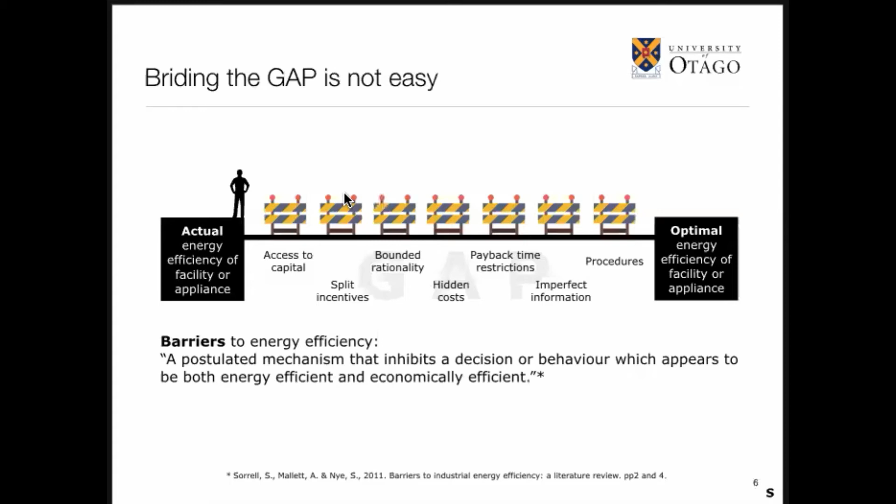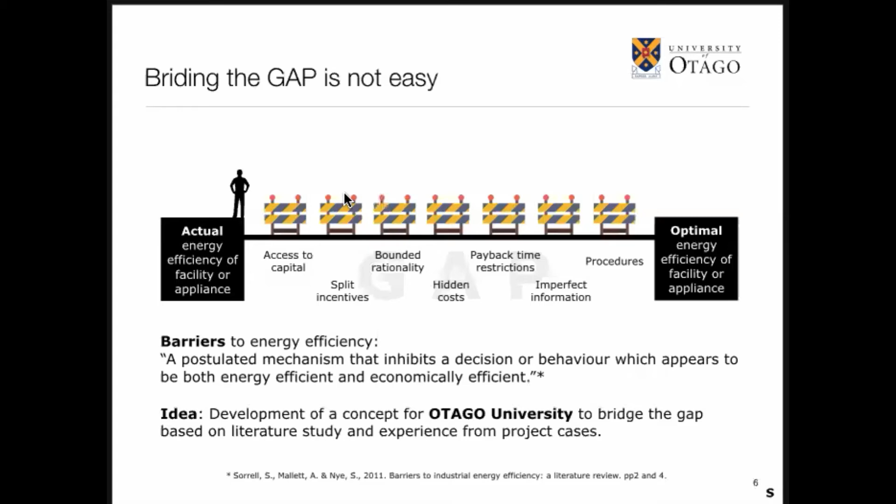So what is necessary is we need to do something. We need to have some sort of a concept. That was the idea: development of a concept for the Otago University to bridge the gap based on literature study and experience from project cases. Okay, let's go one step further. So we try to bridge the gap. So we focus on the gap.

What is the gap? The gap, as I said already, is the actual energy efficiency compared with the optimal energy efficiency. So the focus is on energy efficiency. What is that? Energy efficiency is usually defined as useful output divided by energy input. So it's not just the energy consumption. From the energy efficiency point of view, it is acceptable to increase energy consumption in cases in which the useful output increases also.

Yeah? So this is relevant here. So we are not talking about energy consumption solely. We are talking about energy consumption in relation to the driver. So what is energy efficiency in practice? Here's an example.

Boiling water, for example. You want to boil 10 liters of water, and you need around about 1 kilowatt hour for this. And you write such a quotient: 10 liters boiling water divided by 1 kilowatt hour energy. This is the value of the energy efficiency.

Often people have problems using this energy efficiency value. Sometimes it's a little bit difficult to understand. And therefore, in most cases, you see the reverse, the inverse formula. So you just put it upside down, and then you get not the energy efficiency, you get the energy intensity, which is energy input divided by useful output.

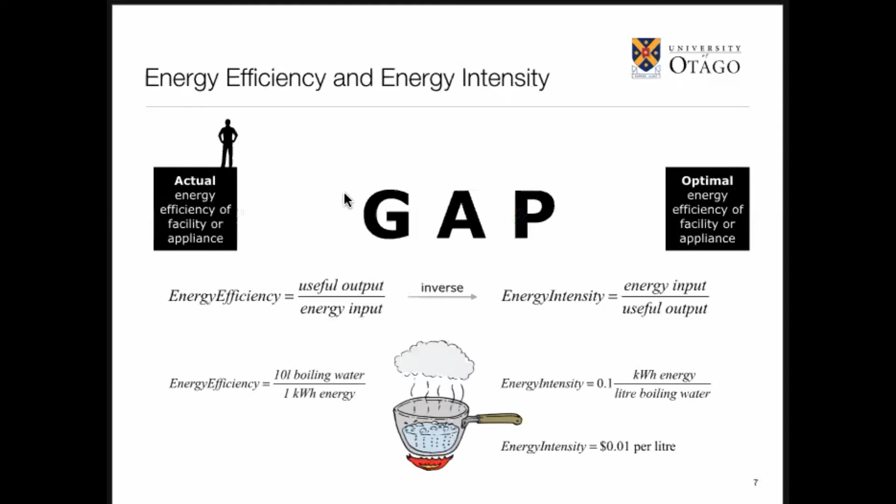And in practical industry projects, we are very much used to using energy intensity instead of energy efficiency. Although we say we want to increase the energy efficiency, we calculate energy intensities. We will do this later. You will see. Okay. Next point.

So I explained energy efficiency, the formula. And now we should talk about the energy efficiency gap. What is that? The gap is commonly defined as the difference between actual and optimal energy efficiency. So the question now is, what is optimal? There is not one optimal efficiency. There are different kinds of optimal efficiency that we have to differentiate. And we have to select one that should be the benchmark for our actual energy efficiency.

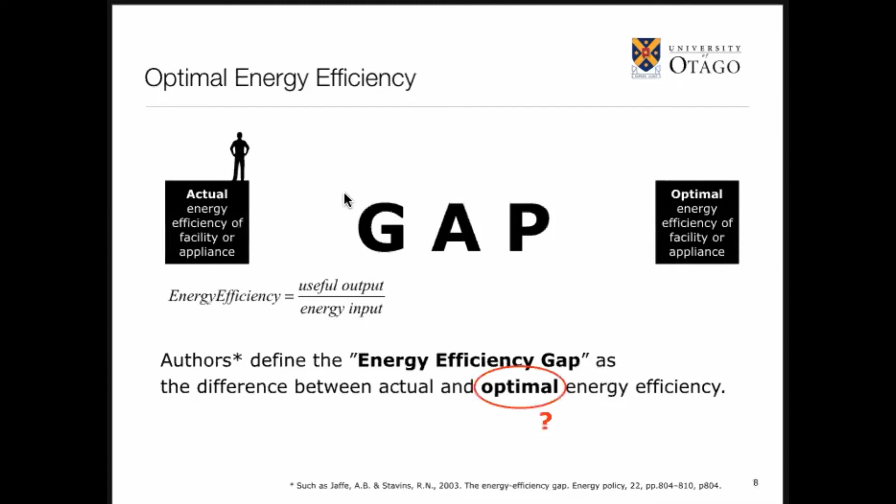What do I mean? Usually we differentiate three types of energy efficiency: the thermodynamic optimum, the technological optimum, and the economical optimum. All three of them could be the benchmark for comparing with the current level of efficiency. What do these different optimums mean?

What are the differences? The difference between the thermodynamic optimum and the technological optimum is the technological innovation. This here is the absolute limit. This is what theoretically could be possible in the future. More efficiency is not possible as far as we know at the moment. That does not mean that this is practically possible.

This is theory. And the difference between what is theoretically possible and what could be possible in real life, this is then the technological optimum. So this is a matter of technological innovation, technological development to go from here to there. The difference of these two bars here could be named technological gap. This is one part of the different gaps that we should discuss, the difference between thermodynamic optimum and technological optimum.

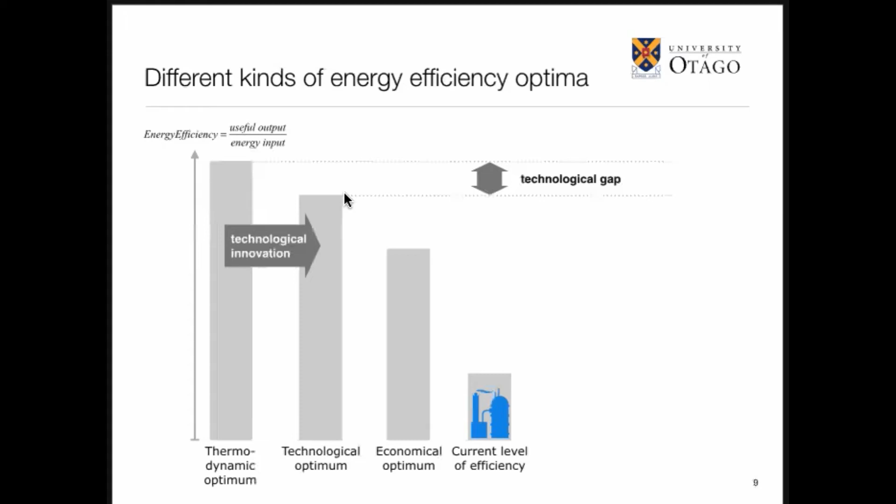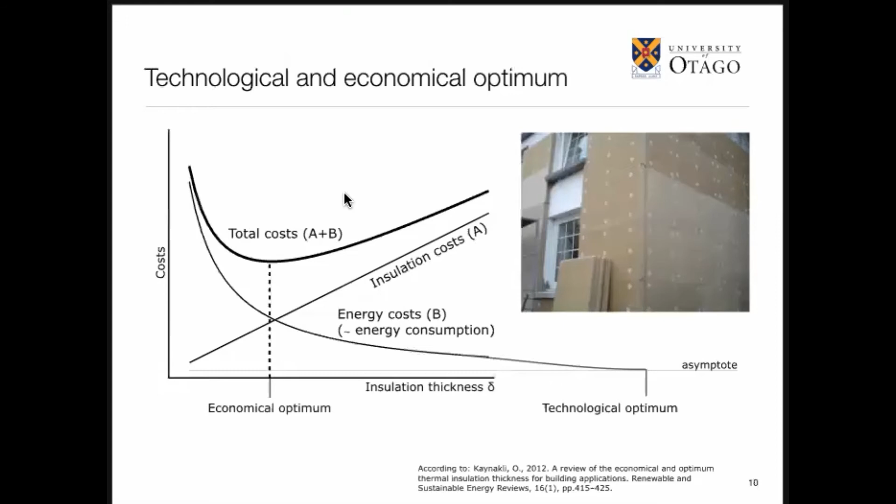Our question now is, what are the parameters? The parameters can be found out by varying the influence factors, the drivers of these functions. For example, what can I do? I can say, look here, this was my insulation cost. What happens if the price of the material decreases? Then the function goes from here to there, this red line, right? So this is a little bit cheaper.

And on the other hand, if the energy prices rise, then this cost function here goes up. And if this goes up from gray to red, and this goes down from gray to red, then we have a shift from this optimum to that optimum. So that means the parameters of the economical optimum are, first of all, the investment prices of what you have in mind when you want to increase the energy efficiency. Here, this is the investment. And if these investment prices go down because of mass production, whatever, this is good for energy efficiency because the optimum goes from here to there.

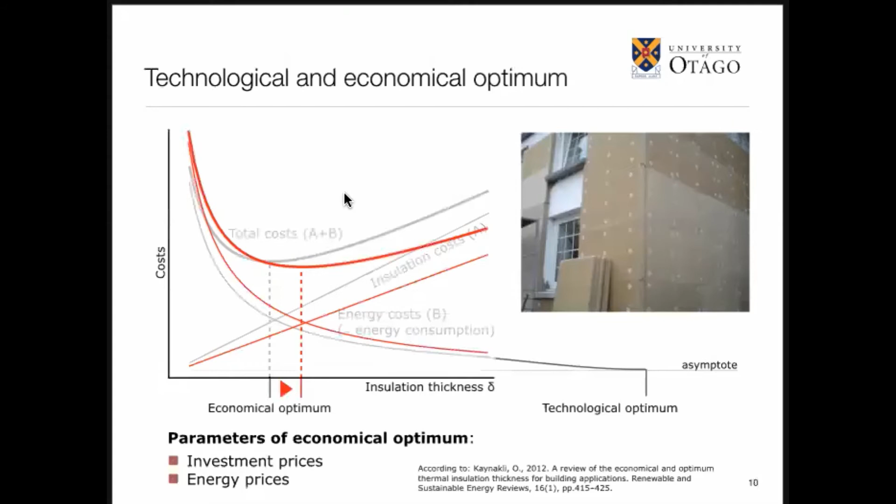Or it is good for energy efficiency when the energy prices here, from gray to red, go up. When the kilowatt hour becomes more expensive, then we have such a situation. All right. So in other words, the difference between technological optimum and economical optimum could be named a cost gap. It's depending on energy prices and investment costs. So we're not talking about this. This is determined by technological development and by external cost settings.

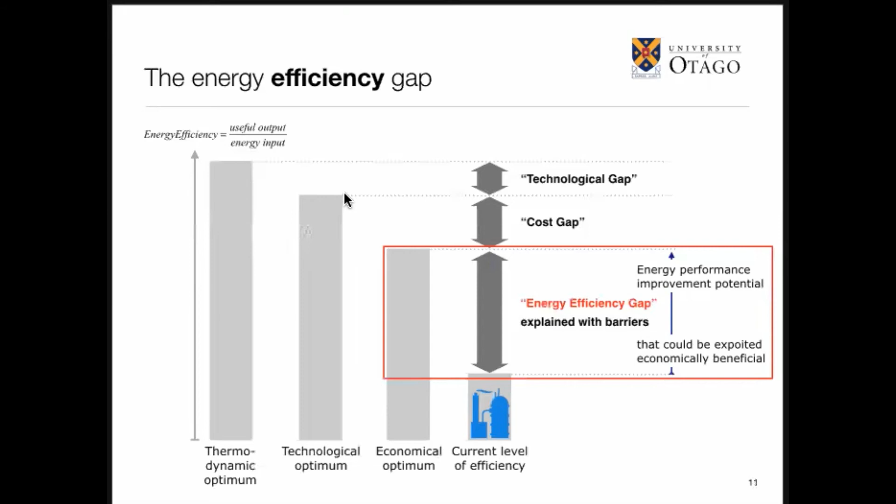We're talking about this, the energy efficiency gap. This is the remaining part of the difference between the current level of efficiency and something optimal. So it is the difference between current level of efficiency and economic optimum. This is what we think we should exploit, which generates a positive net present value. But most of the companies have this gap, but they don't do it. So it is the energy performance improvement potential that could be exploited economically beneficially. And as I said before, the prices of investment and also of energy play a major role here.

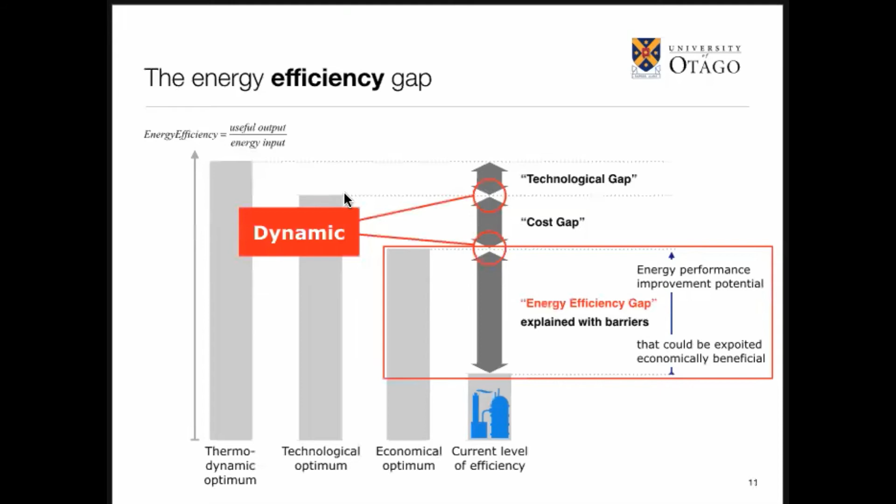These gaps here, how big they are, this is dynamic. As Ivan said already, it is not static, it's dynamic. So that means when we want to exploit the potential that might be there, we should try it on a regular basis, not just one time. It's not a static thing, it's a dynamic thing.

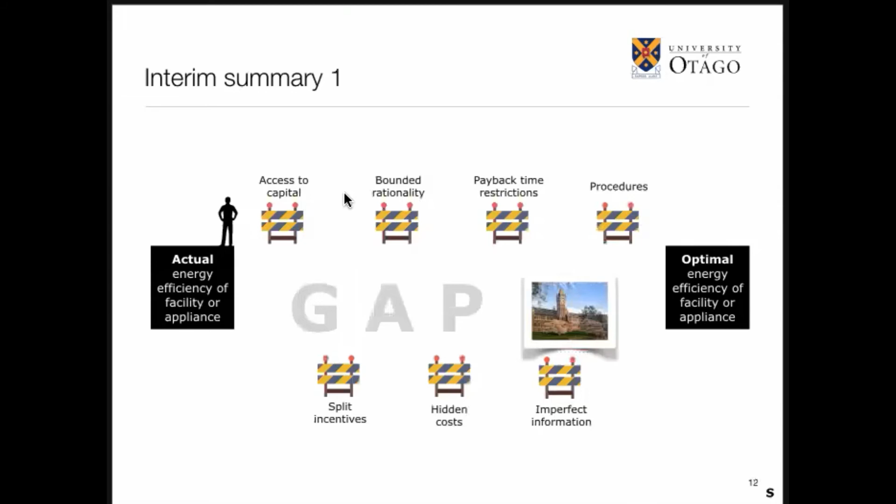Okay, let's try to summarize what I've said so far. So first of all, there's an energy efficiency gap. Most likely also, as we know already, at the University of Otago. Like in all organizations, there is a gap that we should bridge. There are lots of barriers that should be removed in order to exploit it. We need a platform, an environment, something that helps us to continuously exploit the economically beneficial energy efficiency potential in a way that this something must help us to remove.

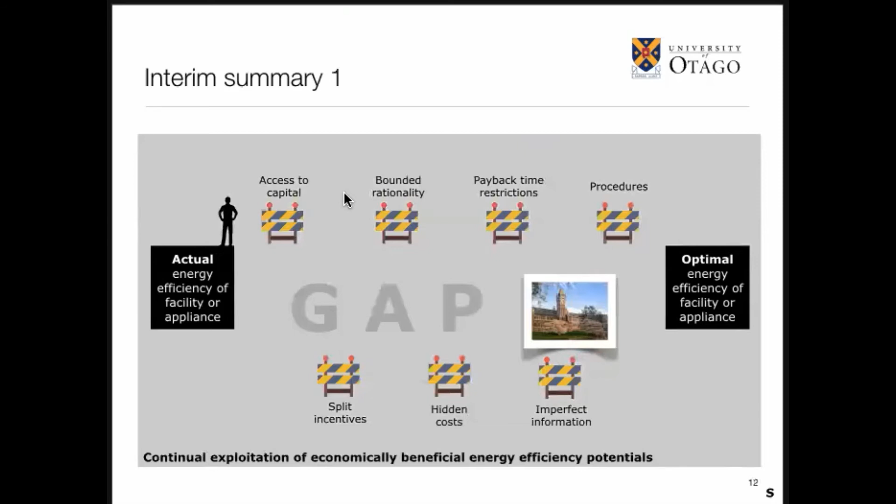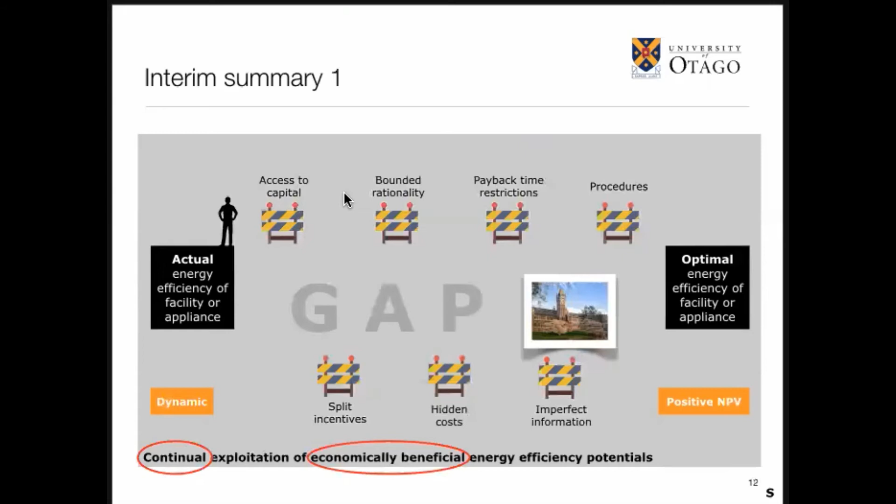It should be dynamic, therefore continuous, and it should tell us the economically beneficial energy potential. So it should tell us what the positive net present values are, and this something should remove all of the barriers and build the bridge. This is what we want. So having this in mind, we started to generate ideas. What can we do in order to bridge the gap here at the Otago University?

And one first element that came to our minds was ISO 50006, an international standard that was released in 2014. And the idea was that we could use this standard, which has already, and I'll show you in a moment, proven to be very effective, as one of the elements. What is it about? Let me just briefly explain what ISO 50006 means.

It is an international standard for increasing the energy performance of organizations. That's the target of this standard.

How does it work? When you implement this standard in your organization, the first thing that you have to do is the determination of the energy consumption of all relevant processes. You set up a list of all of your relevant processes. I'm not talking about coffee machines or something, I'm talking about the relevant processes. Then you set up such a list, you put them in an order, and then you check what are the so-called significant energy users: those processes that you would consider as very energy intensive.

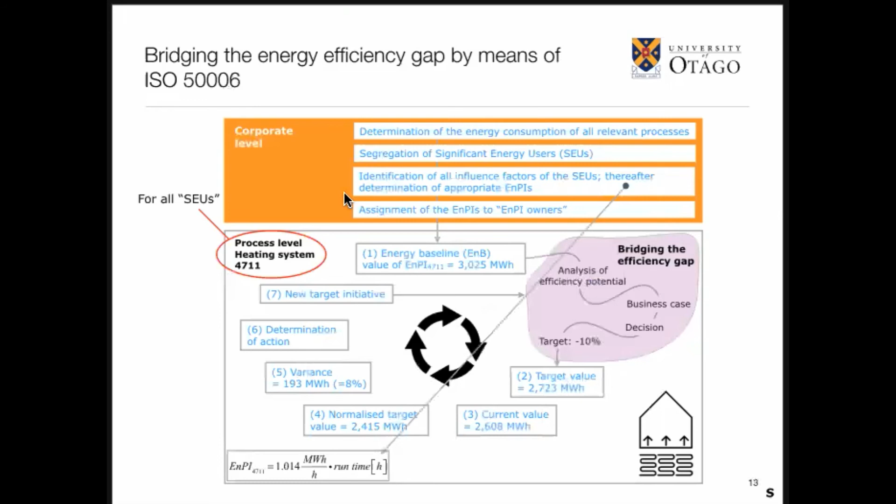Theory. So we were kind of impressed by this standard when it came up, 2014, and we had the opportunity to establish an energy efficiency network in 2015 that was based on an initiative of the German Ministry of Economic Affairs. We had the chance to work together with 7 industry companies. We introduced over a period of 2 years the ISO 50006 and tried to find out what are the problems, how good does it work.

The result was fantastic. These 7 companies could reduce the energy consumption tremendously, and the net present value, so the value of the improvements, was more than 17 million euros for 7 companies, so in New Zealand dollars around about $30 million, only by working together, by going that way that I just explained. Yeah, this is energy consumption reduction by using ISO 50006.

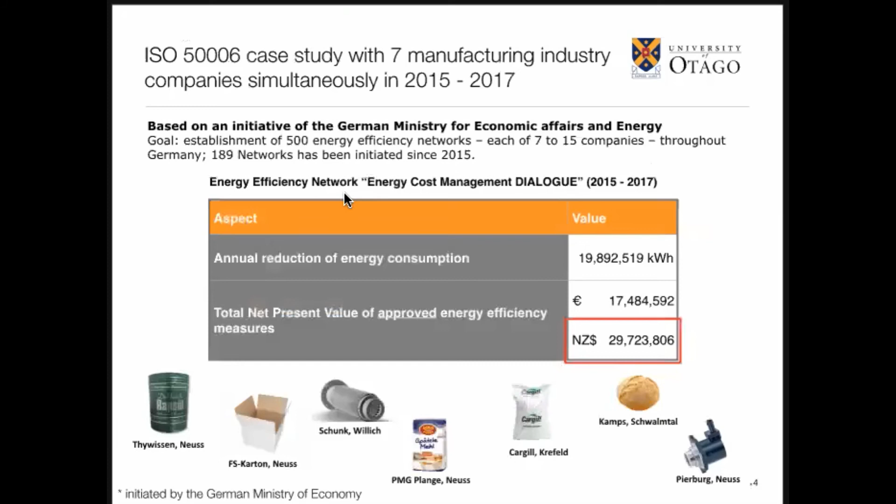So, the experience that we made during these 2 years of implementing ISO 50006 is as follows. During that time, we found that it was sometimes very difficult. It was not so difficult to find good ideas for improving the energy efficiency of processes, of machines, for example. The problems were that there were not only barriers that we should remove, but there were also quite a lot of so-called prerequisites that we had to fulfill in order to make it happen, to go from the starting energy-consuming process to the energy efficiency improvement.

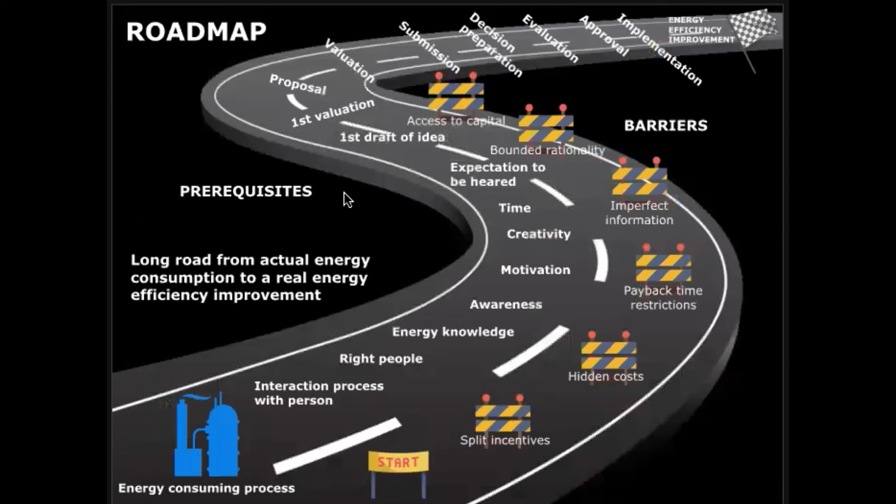That worked more or less pretty well in most of the cases, but the biggest problem that we had was here at this point, almost at the end: the valuation of the ideas, then submission, decision preparation, and so on and so forth. So to put it together, we could say that there are 3 core prerequisites that should be fulfilled in order to make a first energy efficiency idea happen, to make something out of it.

And the core prerequisites are, first of all, exploring energy cost-saving ideas. There are several barriers within this, but that wasn't that big a problem in most cases. The big problem, in all of the cases, was the valuation of the ideas. The people in the companies that developed ideas to reduce energy consumption came quite early to the point where they said, okay, I have wonderful ideas and I want to make them happen, but the people responsible for making the investment decisions did not have any understanding. They said no, for different reasons. So that was a big problem.

And the third one was decision preparation, approval, and implementation procedure. As soon as you have evaluated ideas, then you wanted to make them reality. You wanted to have a decision. You have to prepare the decision, all these kinds of things. That was quite difficult.

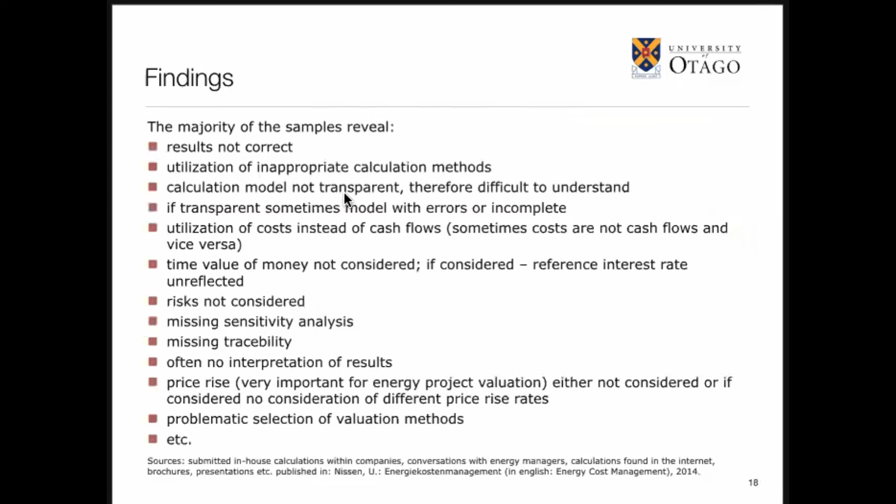The biggest problem, the main finding was, however, that there is in the companies very often a communication problem between those that have an energy efficiency improvement idea and others that prepare and make the investment decision. Here's a typical situation. Here's Jim and Mike. They have an idea. This is a heat recovery facility, for example. They think this is a good thing. We could reduce the energy consumption tremendously, and they set up a proposal, for example, investment 36,000 euros, reduction of the energy consumption like this.

And they give it because they are not competent to decide. They give this, for example, to the director of management accounting, Harold. And Harold looks at this and says no, because he does not understand, or the proposal is incomplete. It's not made for such decisions. So at the very end, in many cases, apparently good investment proposals were refused because of communication problems.

And then we said what is necessary is correct, easy to understand, easy to use, transparent, retraceable, and conclusive valuation procedures. They are not there in most cases in the companies. So in other words, we need something that translates the technical ideas here into the language of decision makers. This is not there. We need such a thing. So after finding this out, we published publications about it. We did presentations, talked to many people. We found that others were of the same opinion.

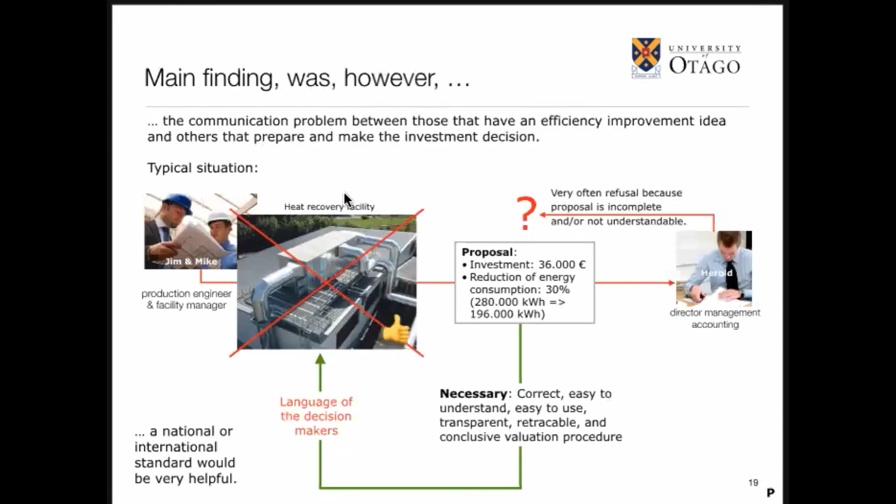And then it took like 2 more years when we heard that on the CEN level, CEN is the European Standardization Organization, which is very strongly linked to the European Commission, so the European government, they have started to discuss that we should start to develop a European standard on valuation. And then they asked us to develop a draft. This is what we did.

And just several weeks ago, I heard that the draft we developed and sent to Brussels was approved now. So it's going to be further developed in Brussels, so that we can expect that by the end of next year there will be a European standard on valuation of energy-related investments. We call it VALUE.

So I see that I don't have that much time. I jump a little bit. Sorry about this.

Let's go to this just briefly. So what I want to say is, we had in mind ISO 50006, a good basis for trying to find out what the potentials are here at the Otago University, and to have some sort of mechanism to bridge the gap on the one hand side. On the other hand side, we used the draft standard of CEN, what has been developed so far, because we thought that it's a good basis for the valuation of possible energy efficiency improvement activities here. So that was the main initiative. We said, okay, let us implement 50006 and let us use this valuation draft.

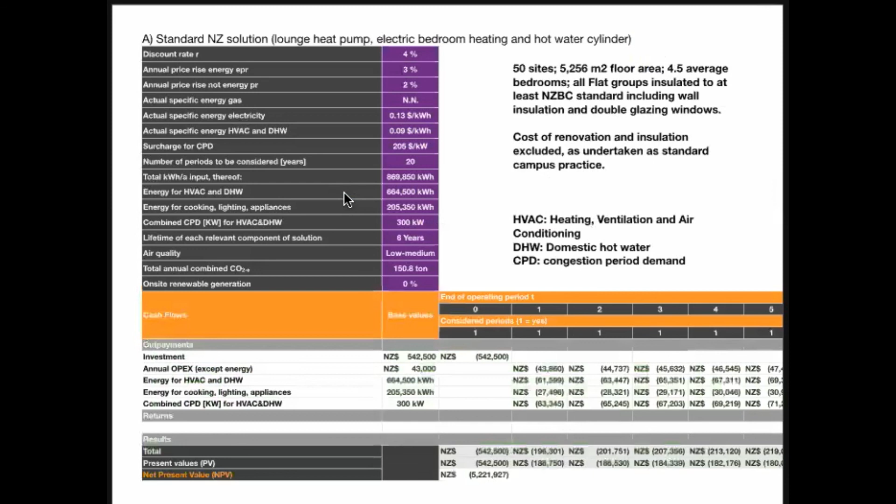So Mark collected all the data that are relevant, we evaluated it, and the result was 380,000 extra, and the return would be 1.1. So under these adjustments of the relevant parameters, we got 11.5 million. So quite a bit. The time is almost at the end, so I don't go into details. If you are interested, in the question round I could go into the details of how we evaluated the different projects.

Last point: as I said, that was the more technical step, trying to find out what is technically possible. Then evaluation. This is not a problem here, not absolutely clear. We have to check this with the project management. And then we came to this area, decision preparation, approval, and implementation. What was the problem? We realized that energy management, together with Living Lab, for example, is not able to make the decision. The decision is made somewhere else.

Therefore, we need to know the relevant procedures that have to be fulfilled in order to have decision preparations that are realistic, that would be approved. And therefore, we decided to contact the project management office, for example, with Andy. And this is where we are now.

We have developed what we call a streamlined submission to decision procedure. I don't want to go through it. So we have developed our own procedure that would be optimal for us, not only for the 3 projects that we work on, but also for future projects. So what should be the steps that have to be gone through from the very beginning of an idea until the decision.

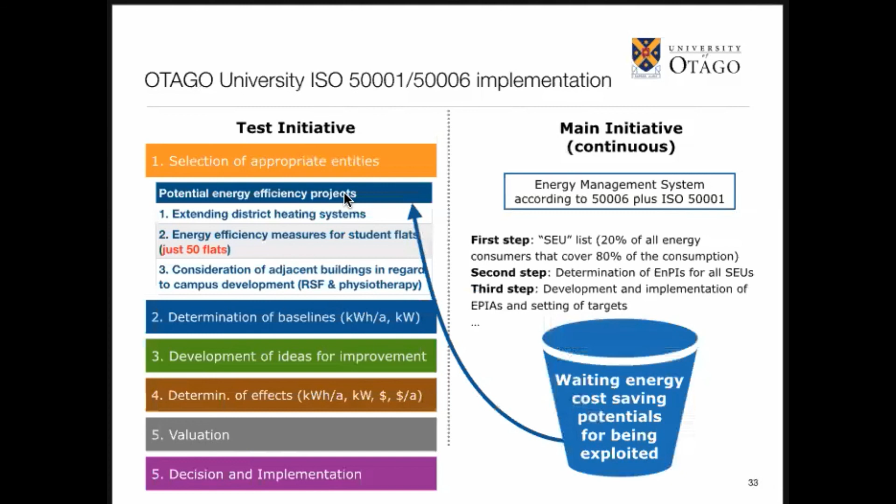So we are here. We're having discussions with the project management. And this is, if you like, our last step: coordination and adjustments with Otago University project management are necessary and intended, so that at the very end, we make this reality. That's the idea.